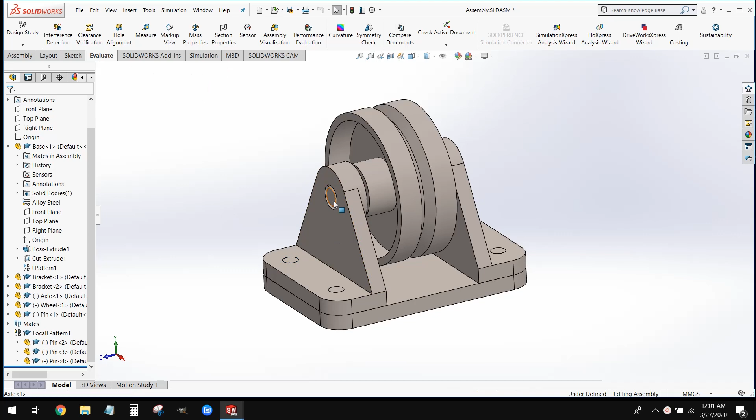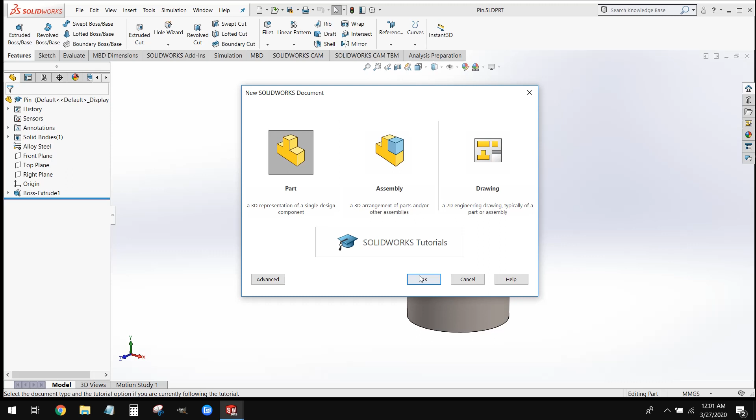Our axle is probably the most complex of the two parts that we're going to be modeling today, and our pins are probably the simplest part we've modeled yet. So let's start with those pins and get these out of the way. We're going to create a new part file and set our units like we always do. Today we're working in millimeters.

This part is really simple. It's just going to be one feature. We're going to select our top plane and create a sketch, grab our circle tool, and smart dimension that circle to a diameter of 10 millimeters. That's going to fully define our sketch for us.

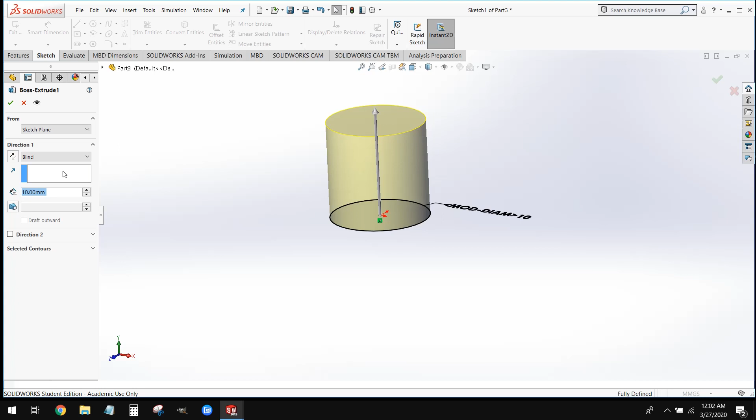Then we can extrude this to a height of 20 millimeters. And that's it, we're done. All we have to do is set our material, and like all of our parts in this series, it's going to be alloy steel. Once we've got this part made, we can go ahead and save this.

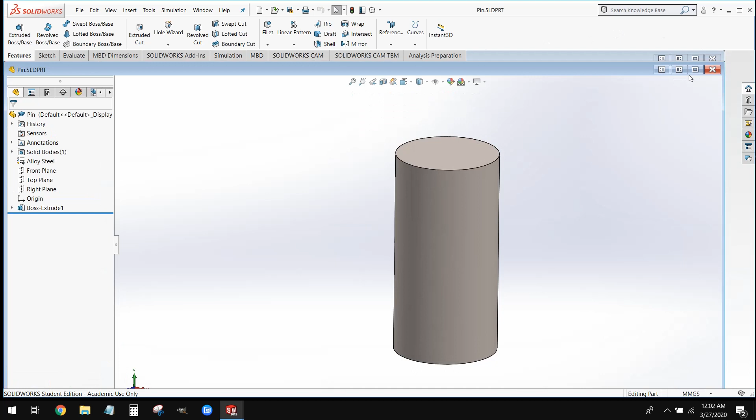Fortunately, the axle that we're going to be working on next is not much more difficult. To start this piece, we're going to create a new part file. Again, we're going to set our units to millimeters. There's a few different ways we can model this. Let's learn a new technique while we do this.

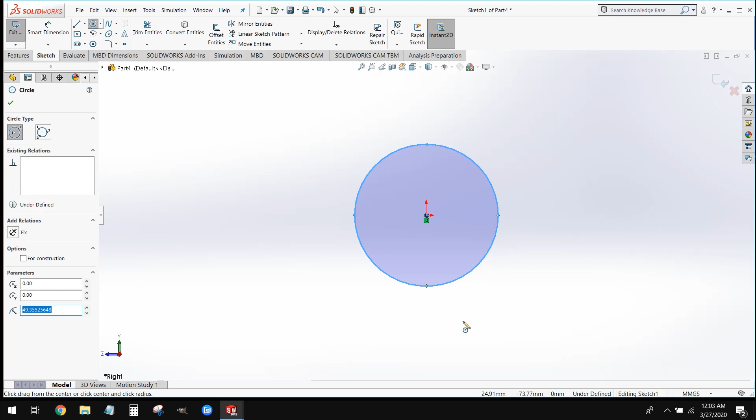We're going to create a sketch on our right-hand plane, grab our circle tool, put it right at the origin, and smart dimension this to a diameter of 19.9. What we're going to do first is make the fat center portion right here. So we're going to go to Extruded Boss/Base.

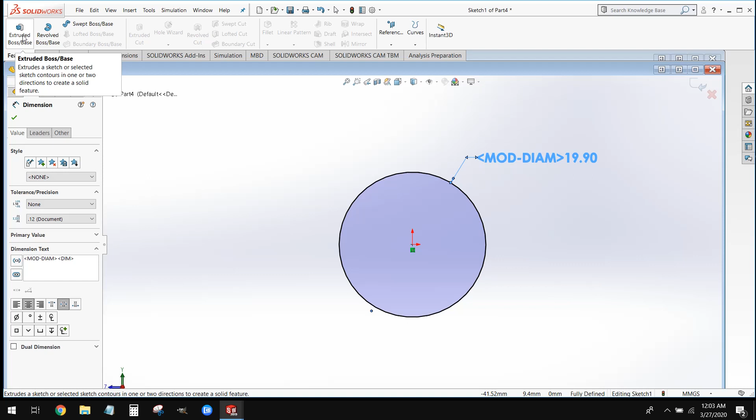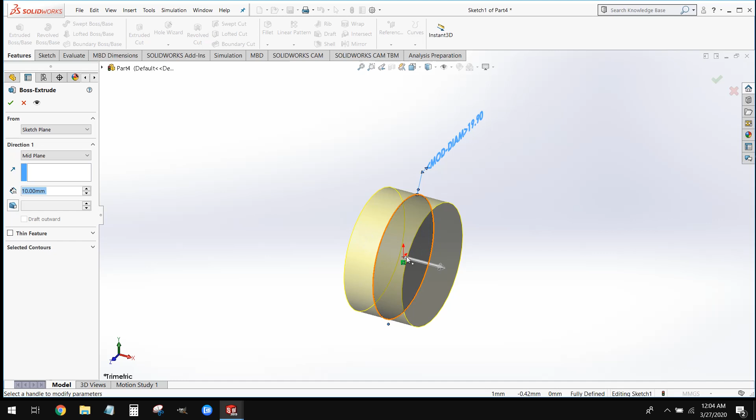Rather than extruding it out one side or the other, we're going to do what's called a mid-plane extrusion, which extrudes it out both sides equally. We're going to come over to our drop-down menu and choose the option called mid-plane. You can see it extruding out both sides equally. We're going to extrude this to a distance of 56, which is a 56 overall length. We can click OK.

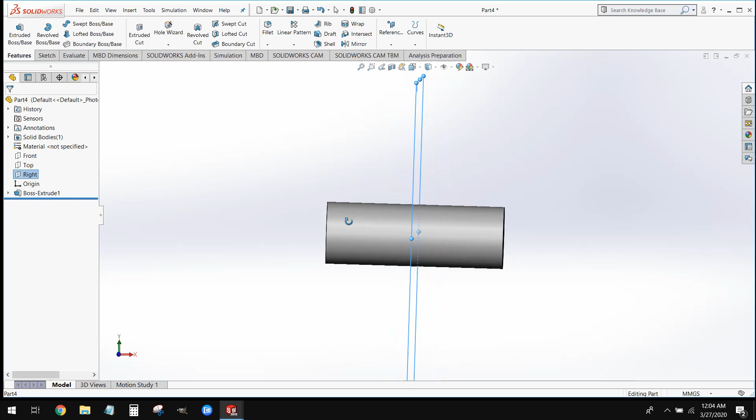The benefit to doing it this way is that it leaves us with a plane in the middle of our part, like we have here. That means we have a surface in the center of our part that we can create another sketch on, and that's exactly what we're going to do. On our right-hand plane again, we're going to create another sketch. This time, we're going to draw the ends that stick out.

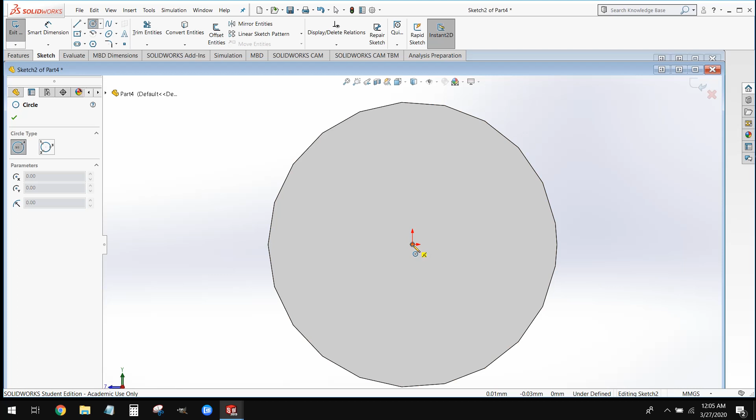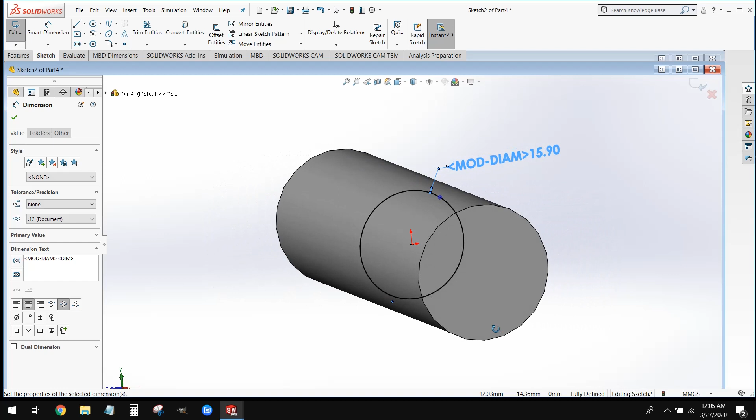We're going to grab our circle tool, put it right at the origin, and draw out a slightly smaller circle. This is going to have a diameter of 15.9. You can see that that sketch is in the center of our part. We're going to do another mid-plane extrusion.

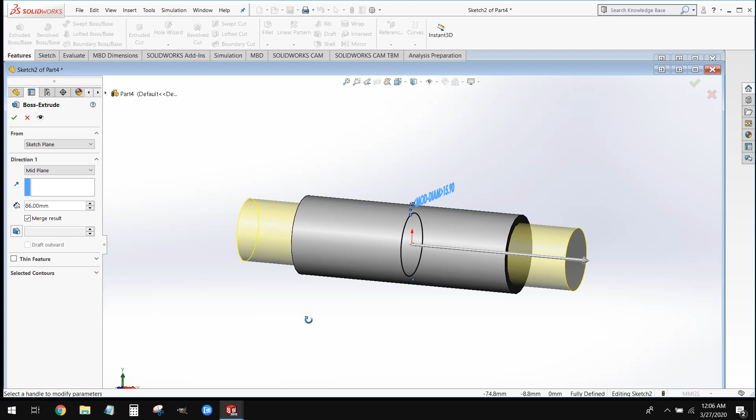We're going to go to our Features tab, Extrude, Mid-plane, and this time we're going to extrude it to 86 millimeters, which is our overall length. You can see how it's extruding out both sides at once. We can select OK. And that looks pretty good.

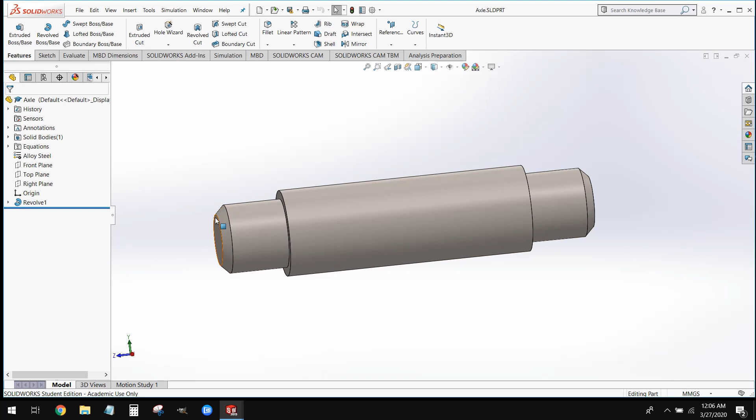Now regarding these bevels on the ends of our axle: in engineering, these are what we call chamfers. Chamfers are kind of like a fillet, except instead of a rounded corner, it's just a straight bevel. We're going to apply the chamfers in pretty much the same way that we apply a fillet. Under our fillet tool in our Features tab, we have an option for chamfer.

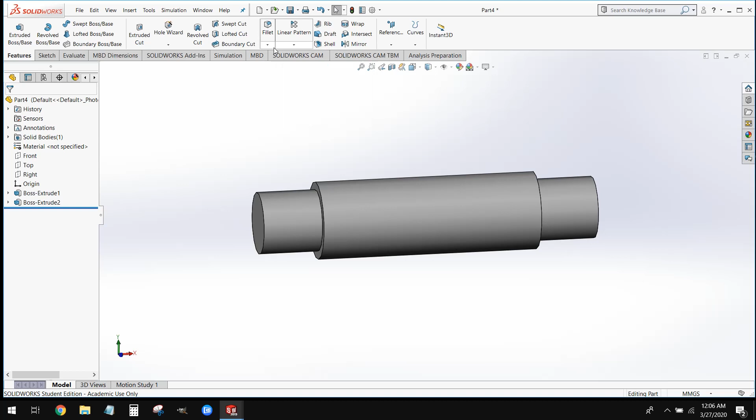On our left-hand side, we have two inputs for dimensions: one for the height of the chamfer and one for the angle. We're going to leave our angle at 45 degrees, but set our height to 2 millimeters. All we have to do is click on the edges, just like we would a fillet, and select OK. And then this part is done as well.

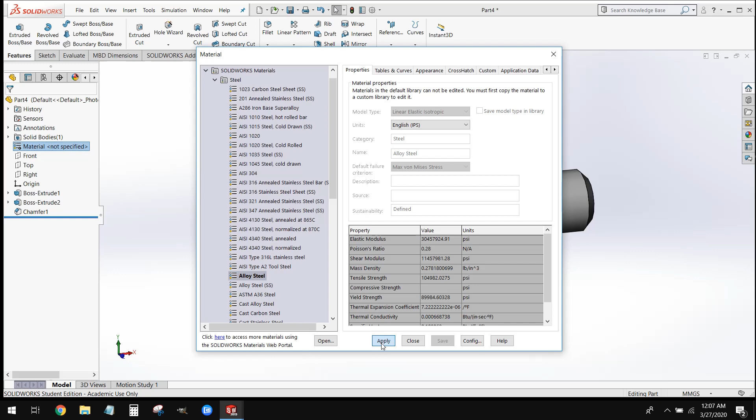All we have left to do is set our material, and like all of our parts in this project, it's going to be alloy steel. And this part's done, so you can go ahead and save this part as well.